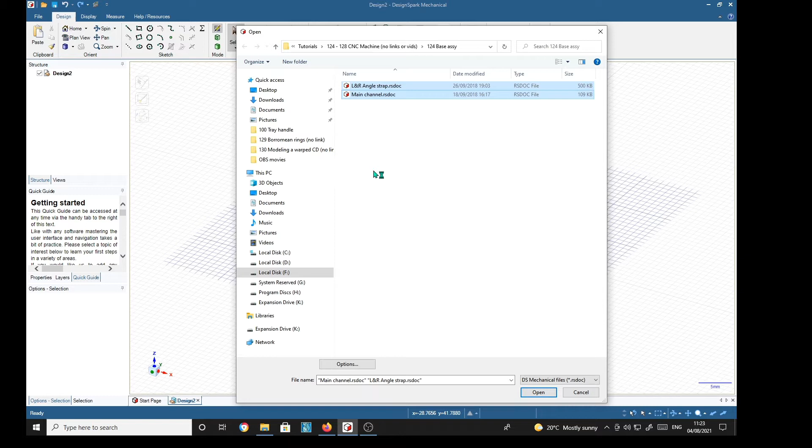We've got our sketch plane ready. We're going to import a couple of files. Only these two files are going to be used to make our base assembly, so we're going to import them both. We'll select them both with the control key selected, which means we can select them both, then open.

Although it's a blank screen, we have imported them. I'll press the H key, which should bring them into view. Yes.

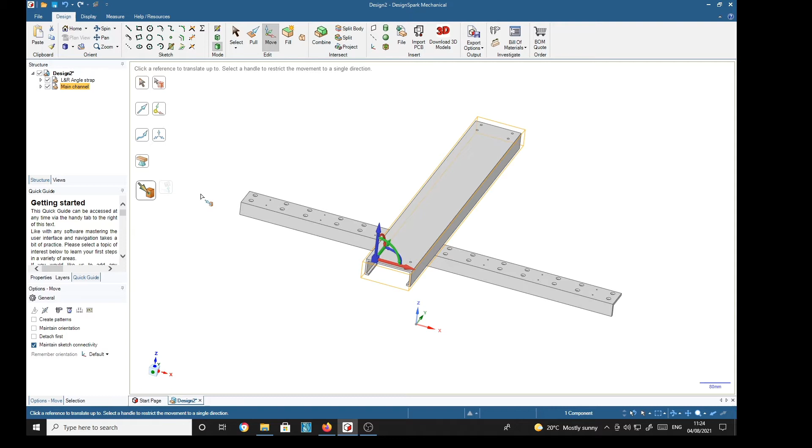Now the first action is to place this channel into the first position on the angle. So I'm going to drag the handle to this locating hole here, this fixing hole, and then select the up to tool, zoom in a bit, and that hole has now to line up with this fixing hole here.

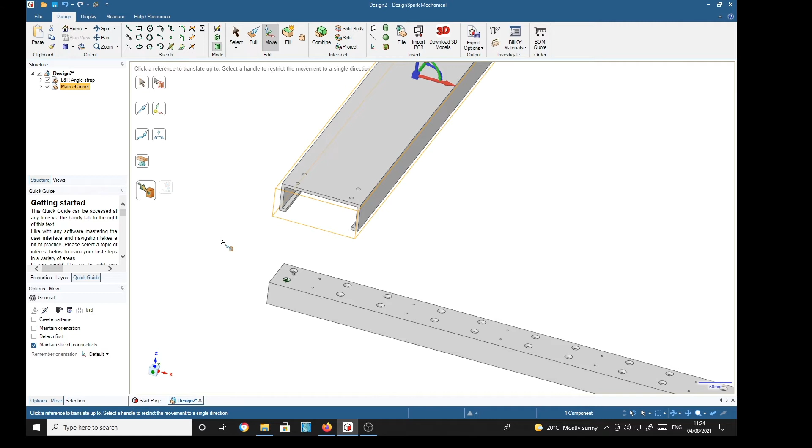Okay, that's that done, so that hole now is in line with that one. But we need this top face, drag it onto the top face, and it's gone into the middle. And that needs to be level with the underside of here, with the up to tool selected. There we have the first one in place, and we see that all the holes are in line beautifully.

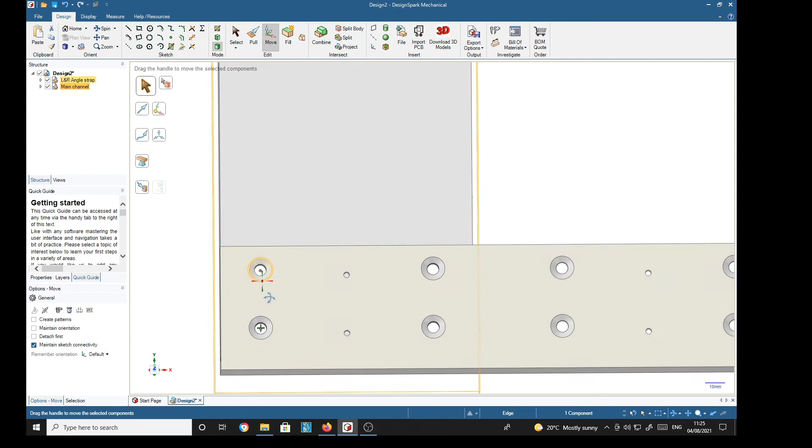Okay, now we need another one of these on the other side. So this is the angle strap.

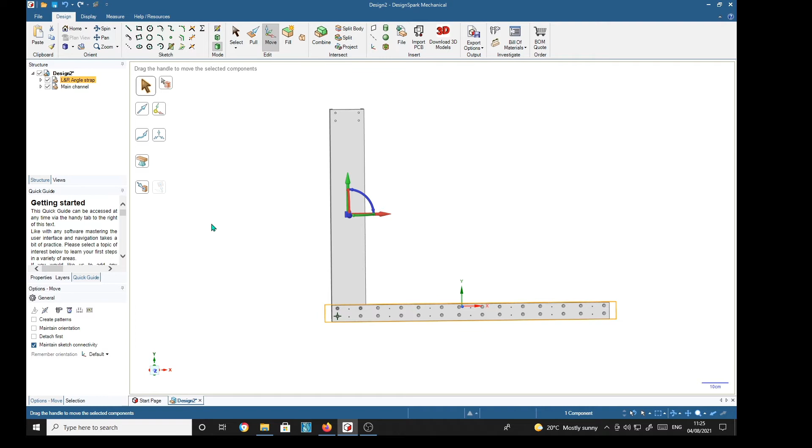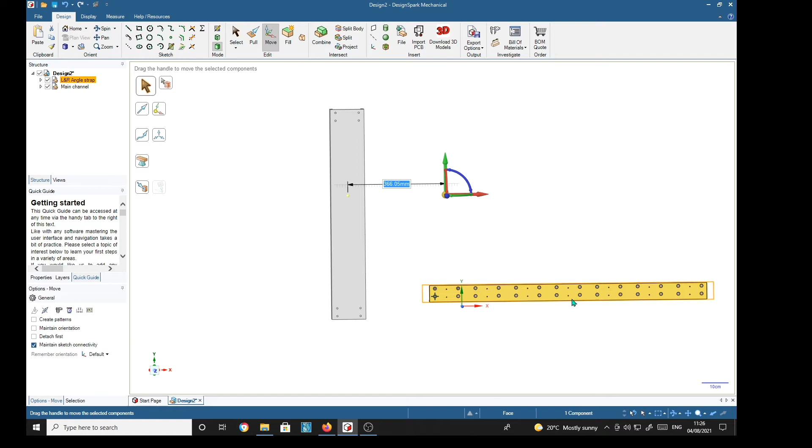Now what's happened here is that the anchor handles have remained in position. You can still drag this part with the anchor handles there, but if you want the anchor handles to be associated more obviously with this part, just click and select, then select the angle strap, and the handles will be associated with the part in question. So that's a little tip for you.

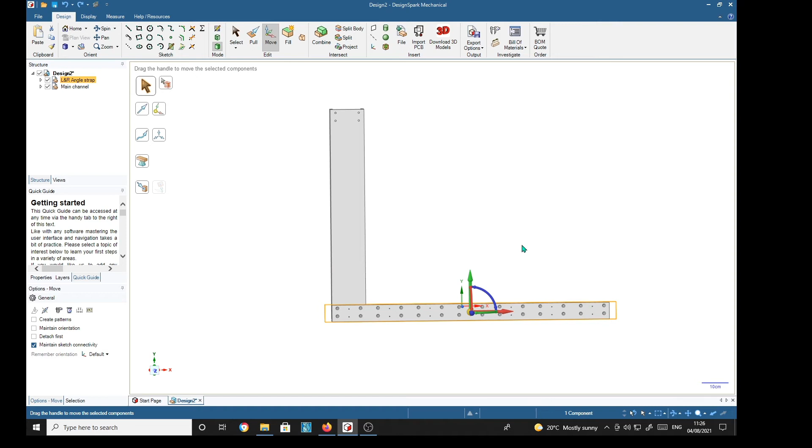Now I'm going to Control Z back to where that was, there we are, and click to get the anchor handle out of the way, then select angle strap. Now by holding the control key I can drag another one off, and of course it needs to be rotated 180 degrees.

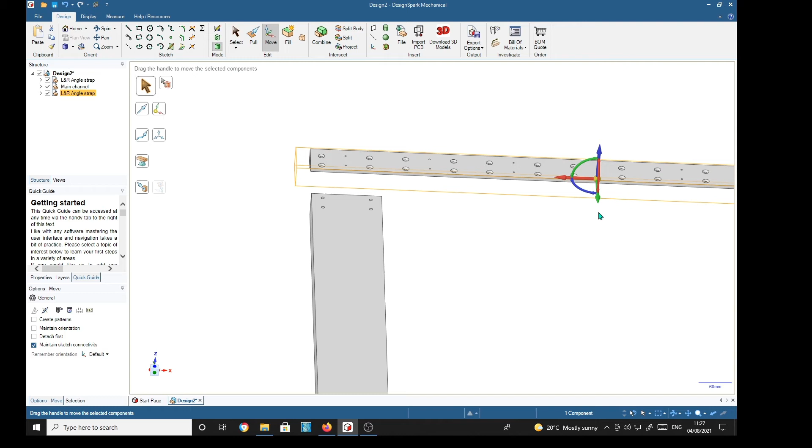Then we need to position it, so we drag the handle to that fixing hole, up to that hole, and there it is in position. So now we've got two straps.

Now what we need to do is put several more of these along the length of these angle straps. So in total we need 1, 2, 3, 4, 5, 6, 7 of them. So we'll select the first main channel.

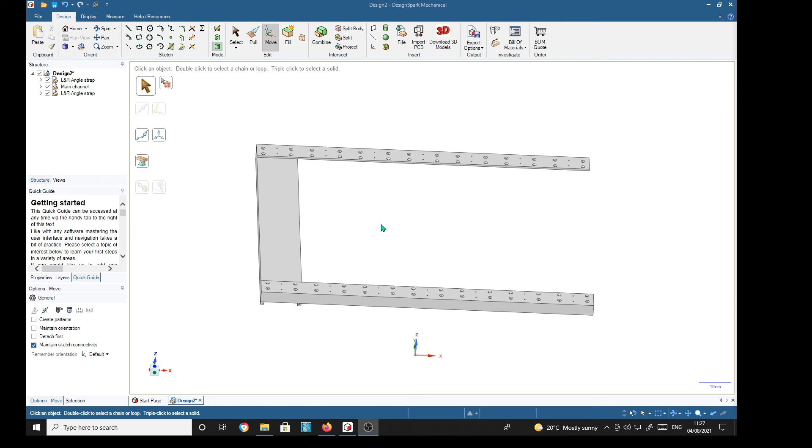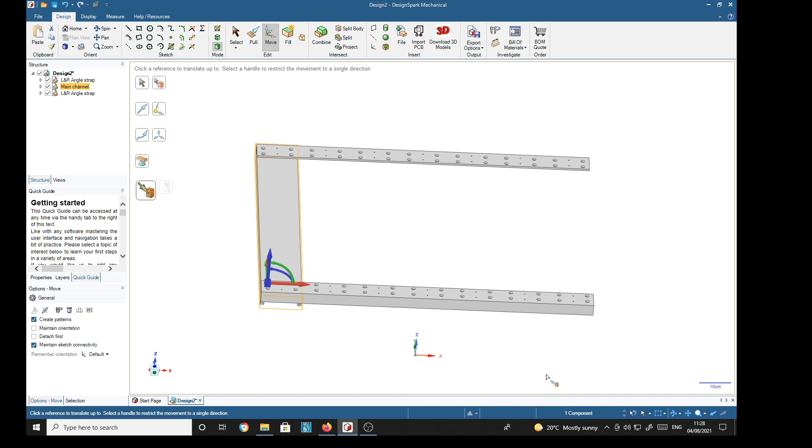Now we're going to move this, but we're going to create patterns. I know that these are equally spaced along here, so we're going to create patterns and select the up to tool, move that to one of the holes there. So with the create patterns and the up to tool, we select that hole there.

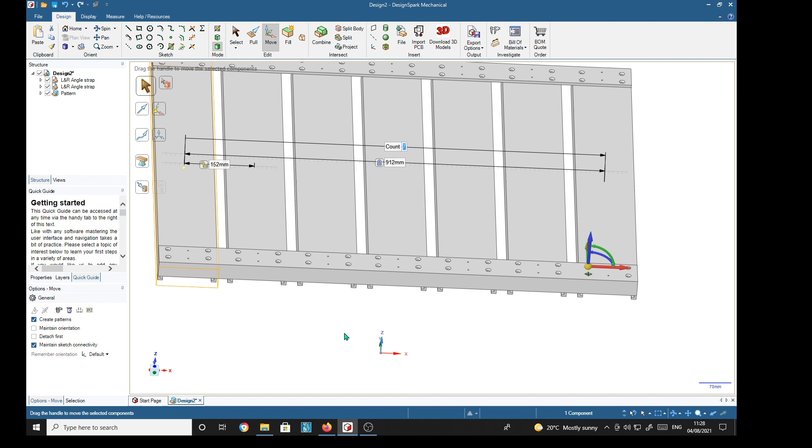It's moved an extra one to this end, but we've got a count highlighted here of 2, but we need 7, so we'll just type 7, return. Click anywhere, H key, and there's our base plate, base assembly.

And that shows an important technique of creating patterns rather than individually placing each one of those. We can do them all in one.